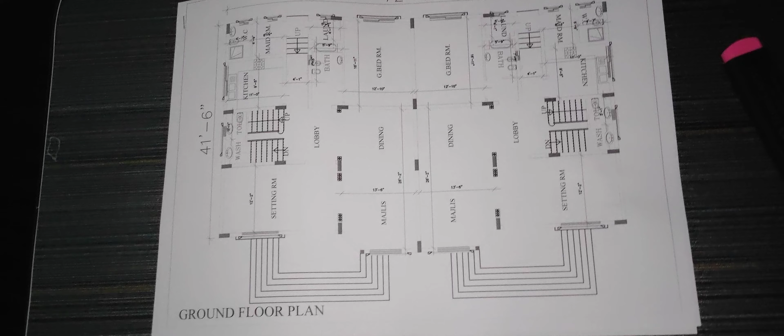Welcome to ground floor and first floor plan design. You will see this one for two brothers, with 4 bedrooms. Please focus on our drawing. So this is for two brothers, divided here.

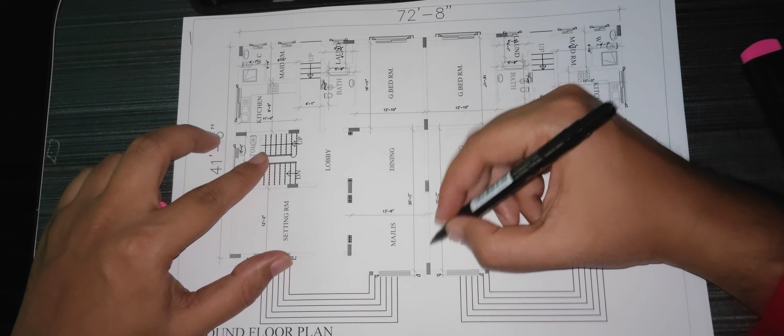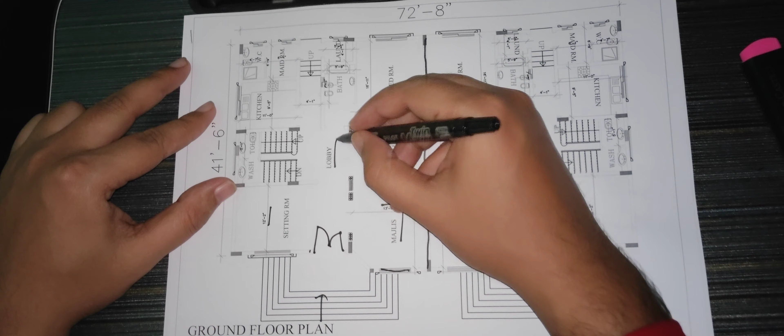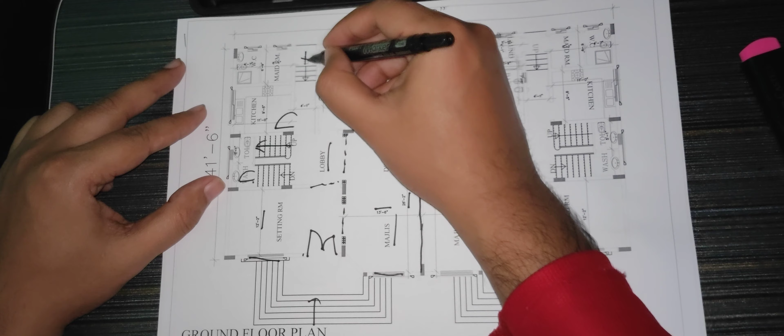This is our wide entrance, this is our door, 12 feet 2 inch, 13 feet 6 inch, 26 feet 2 inch, full hall, dining, lobby, this arch and this arch. This is our window, this is our stair up, this is our stair down, this toilet 5 feet by 4 feet, and this is our kitchen. This back side entrance, this maid room, door here, and this laundry area, and this bathroom.

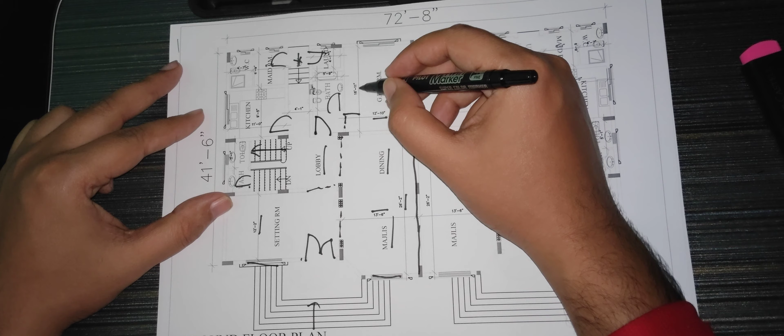For this general bedroom, guest bedroom, we can keep the door like this, 12 feet 10 inch, 16 feet 11 inch. This is our kitchen, 11 feet, 9 feet 5 inch. Same plan, mirror this part.

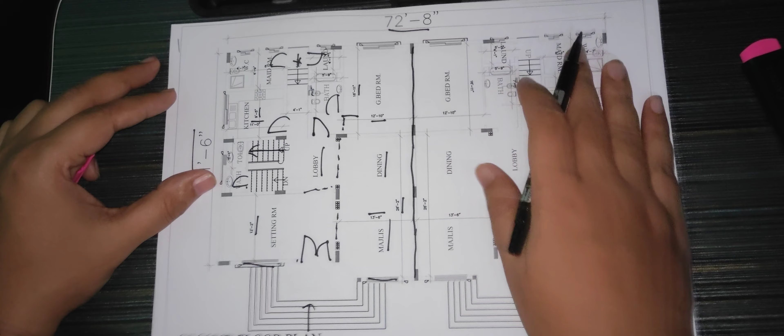So this is our ground floor, 41 feet 6 inch, total 72 feet 8 inch for two brothers. Everything here is same on both sides. This is our window, here window.

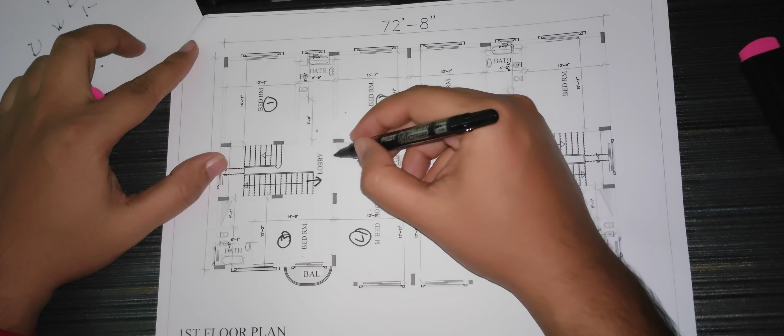So we will go to first floor. This is our first floor. We are reaching here. So this is bedroom 1, bedroom 2, bedroom 3, bedroom 4.

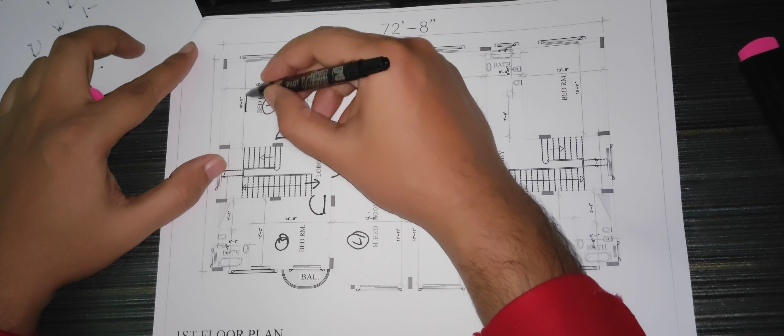16 feet 11 inch by 13 feet 7 inch, and this is given common bathroom for both bedrooms, 6 feet 9 inch by 8 feet, and this 16 feet 11 inch by 13 feet 8 inch bedroom. This side 17 feet 11 inch by 13 feet 5 inch, with attached bathroom 7 feet 9 inch by 6 feet 9 inch. This bedroom 14 feet 8 inch by 12 feet 2 inch, and this is arch.

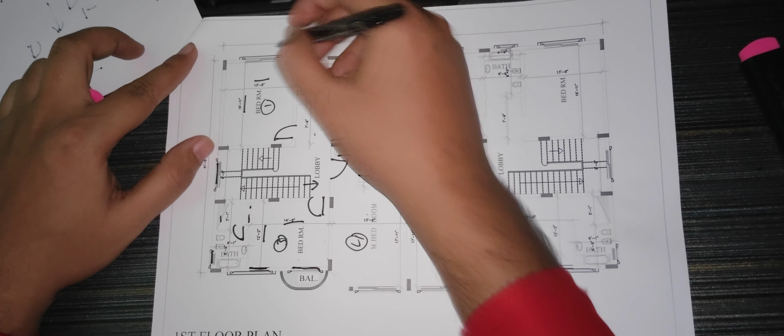This is our bathroom, this is dress area, this is dress area. This bathroom 6 feet 9 inch by 6 feet 1 inch. This bedroom has a balcony. So this window we have given for ventilation. This is stair design window. Here window, here window. This plan same.

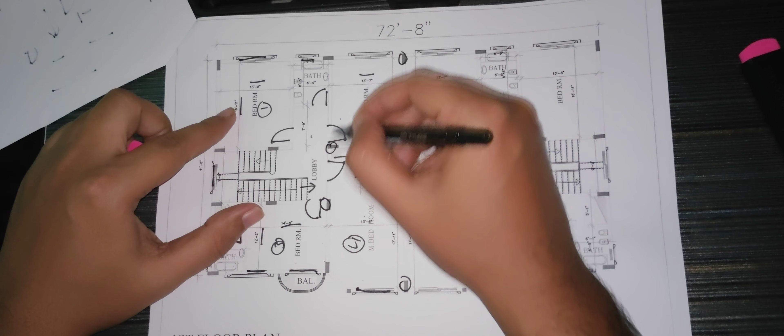So this 4 bedroom design you can use. This is our duct for ventilation, and everything we have given. See column, number of columns, it will come like this. So this has 4 bedrooms, and ground floor has 1 guest bedroom, hall, dining, sitting area, lobby, kitchen, and maid room.

This wonderful floor plan, mirrored, can be made for two brothers.